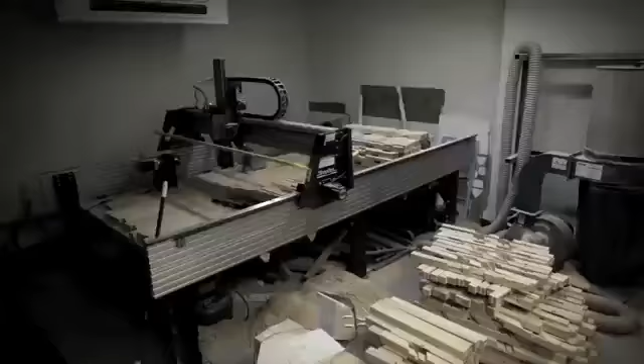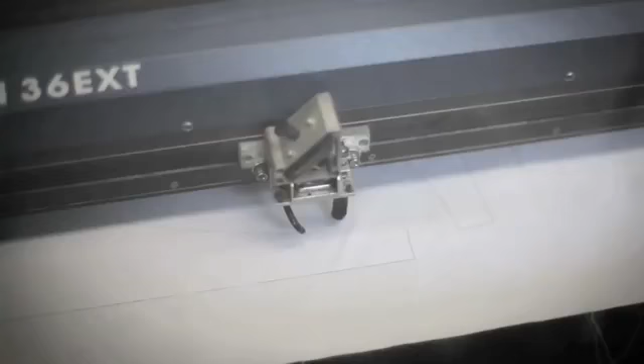Well, MIT is a very different kind of institute. Instead of becoming the recipients of building industry culture, we can now change building industry by the kinds of experiments we're doing in school. MIT has a variety of departments that are so powerful that they have the potential of radicalizing what we do in design and in the architecture department.

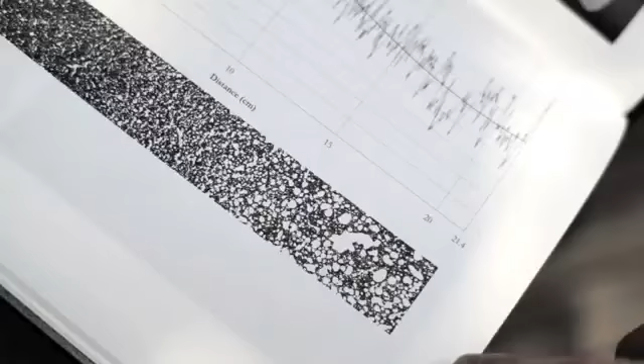Even the way that we've structured our curriculum around workshops and other kinds of collaborations in a way foster and encourage this kind of cross-disciplinary platform. So we're situated perfectly for the kinds of things that only MIT can do.

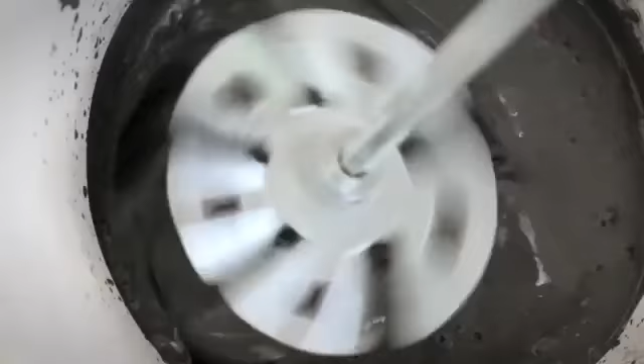The invention of human artifacts of any kind always consists of three elements: the geometry, the process, and the material that constitute that artifact. It's very clear that new materials engender new forms, and architectural design benefits from addressing, applying new materials in an

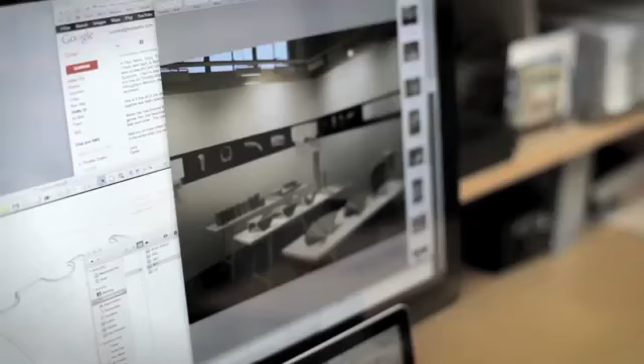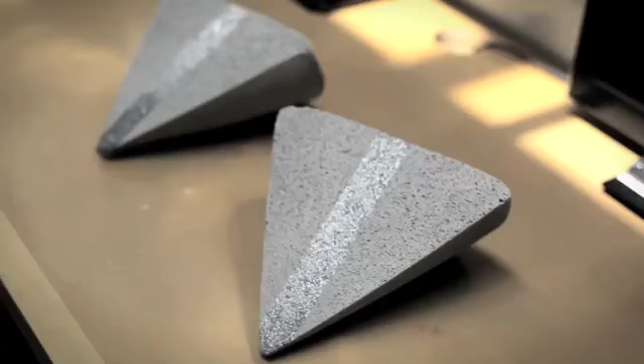informed way. The Emergent Materials Group and the Urban Metabolism Group share a central interest in materials for the built environment. Lately, we've been working a great deal in the area of foamed materials, especially foamed cements and concretes. So typically a beam in bending is going to have the greatest amount of stresses on the top and bottom, so we can reduce the amount of material on the interior of a beam.

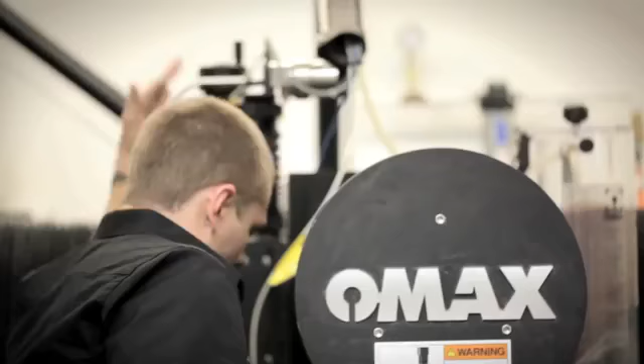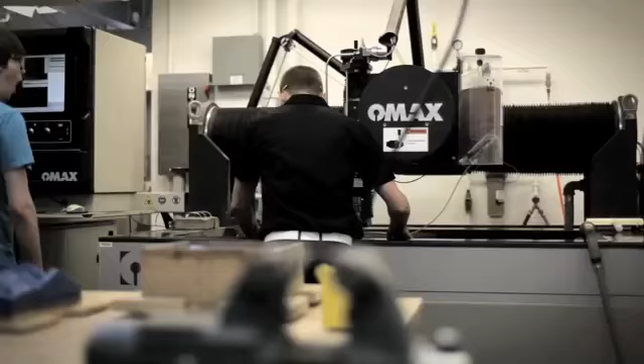The work really tries to address that there's two main paradigms throughout almost every industry. The one paradigm is what can you design, what can you compute or analyze, and the other paradigm is what can you physically construct or what can you build. The work really tries to traverse all scale lengths.

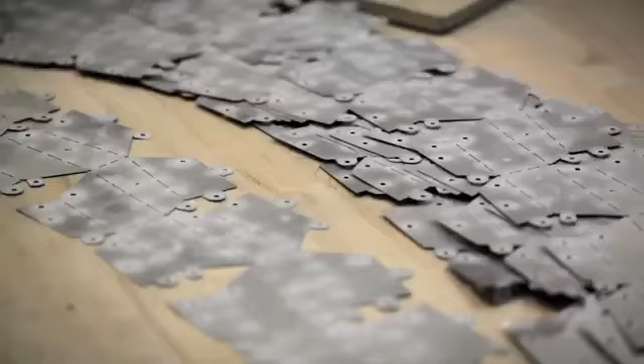It tries to work from the nanoscale, which is traditionally where we see self-assembly in biological examples, chemical examples, and it tries to bridge that and say, can't we use this phenomenon of self-assembly as a new paradigm for building things at large scale?

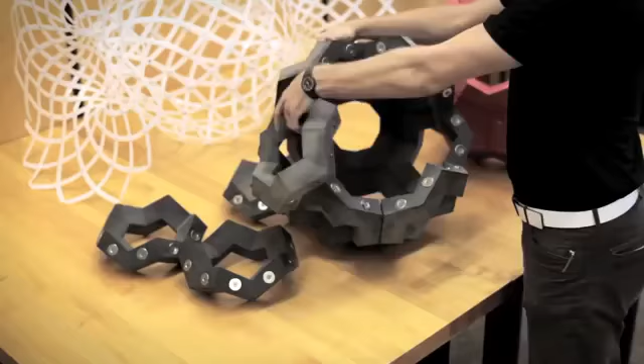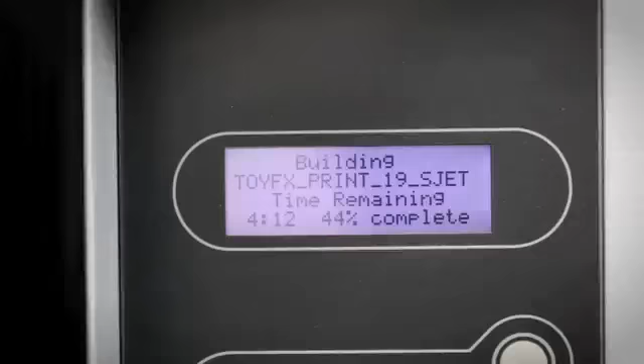We work with any type of material, synthetic or natural materials, and really try to design specific geometries that have materials in mind. And when you design those two together, they can respond to energy. And the energy sources can be heat, shaking, gravity, pneumatics, electronics. So you can use any type of energy.

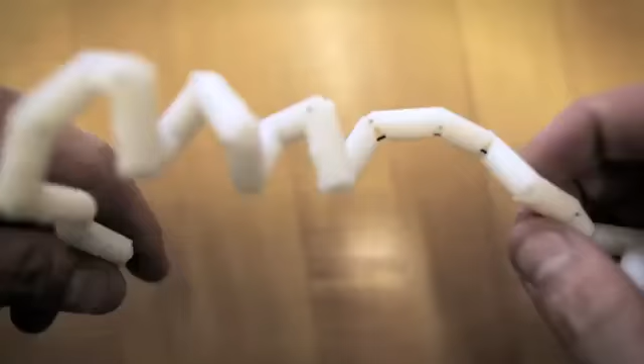And when you mix that with the geometry and material properties, then they can respond and they can change state. Primarily, it will first be applied in extreme environments, scenarios where it's difficult to build.

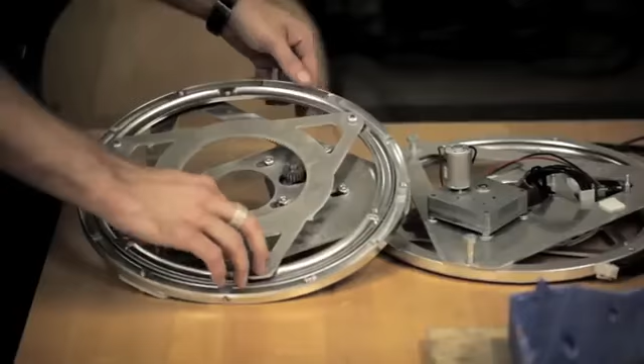The research and the practice is really about cross-disciplinary collaborations between designers, scientists, engineers, working on this phenomenon of self-assembly, discovering where we find it naturally, where we can use it synthetically, and trying to apply that at all different scale lengths.

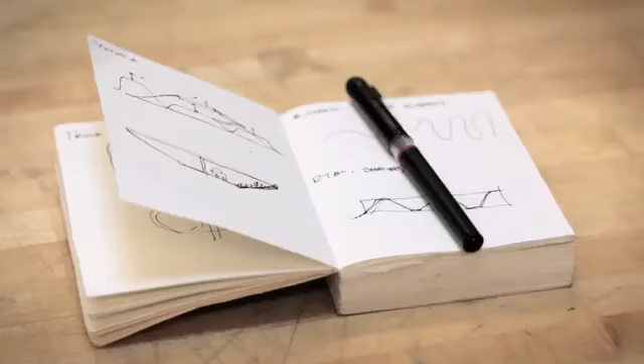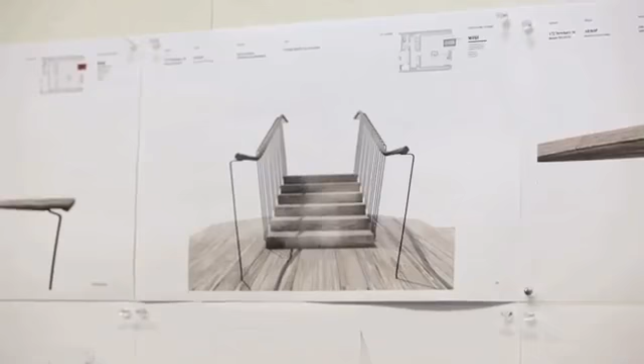The focus of our work, at least at this smaller scale, at the scale of, say, art installations or retail, we leverage CNC fabrication methods, but not as a way to exude their prowess necessarily, but more as a way to help us get at a particular formal agenda.

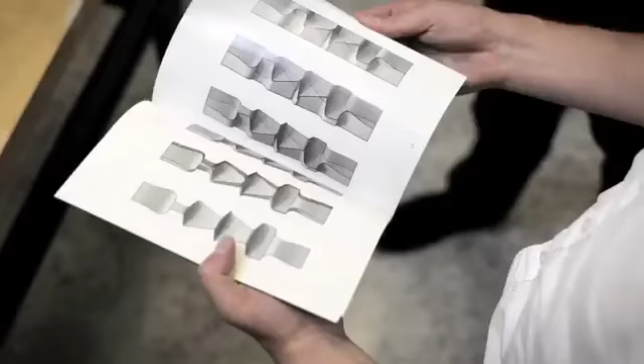An installation called Totems, which in a way is a kind of proto-architecture, not quite architectural, not quite sculptural, but I think that it offers a kind of proposition to each of those disciplines. We do a lot of testing via 3D prints. A lot of the formal investigations for Totems specifically happened in 3D prints.

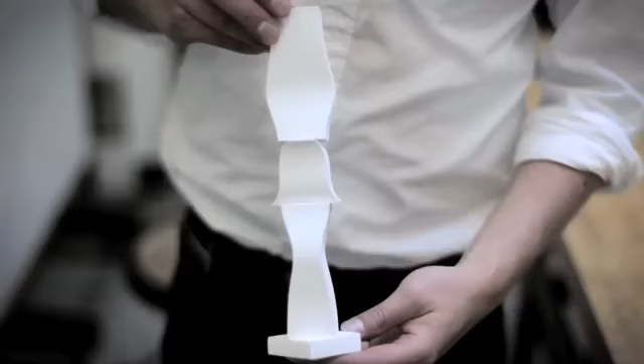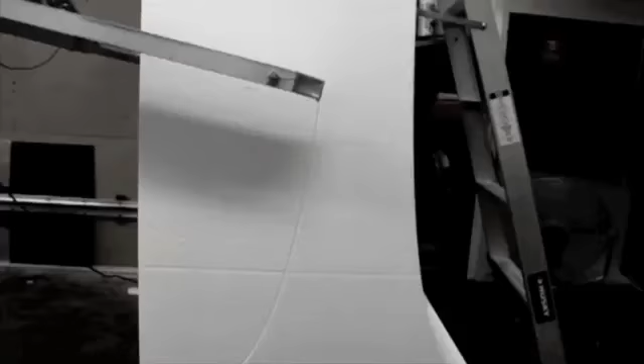We did maybe 30 to 50 3D prints of the totems as a way to understand how the light and shadows were working and how best the anamorphic effects were working before we went to the large format wire cutter. In terms of collaborations, some of those happen here at MIT.

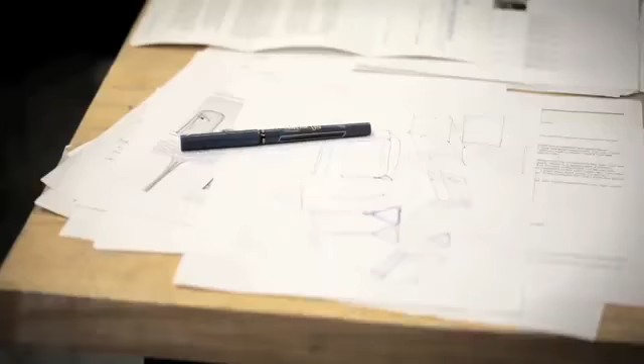Joel Lamere and I are developing an installation now, which is an anechoic chamber, and the anechoic chamber uses industrial felt both on its exterior and as a way to absorb sound on the interior. I'm bringing a kind of disciplinary or formal or geometric interest on the one hand, also a certain set of specialized understandings of the behavior of these sheet materials on the other.

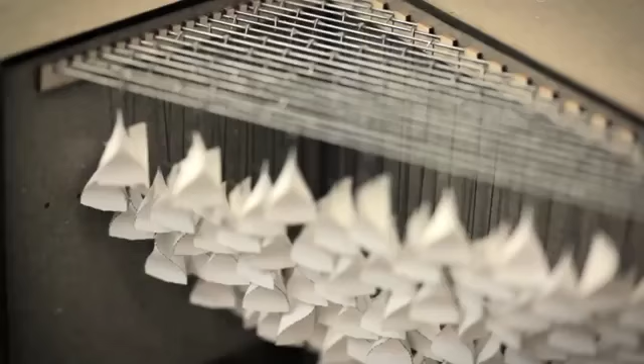So my architectural interests are really broad, but in terms of my current research preoccupation, it's about material geometry, specifically sheet shapes or sheet material geometries, how they bend, stretch, stack, fold. But obviously understanding sheet materials is really critical to architecture. It's sort of a long-standing discourse on sheet materials in architecture, in part because it's so ubiquitous in conventional

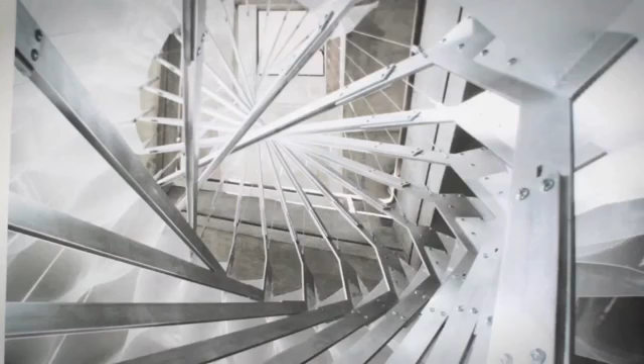construction. So everything including plywood, sheet metal, steel, aluminum, plastics, all of these have to deal with the developable surface geometries, which is to say sheet shapes generally. And so expanding the total set of understandings about sheet shapes is a totally and kind of obviously worthwhile architectural undertaking. These installations attempt to jump from the scale of the paper model to the scale of the architectural space at the very least.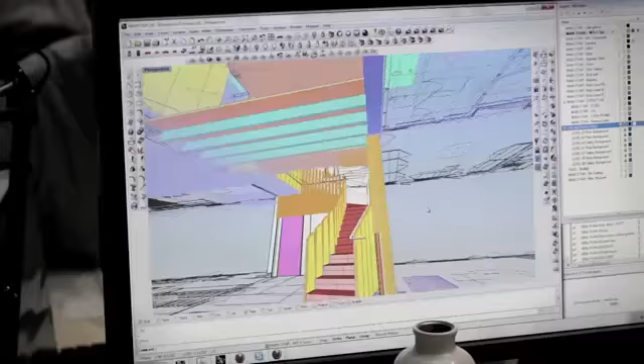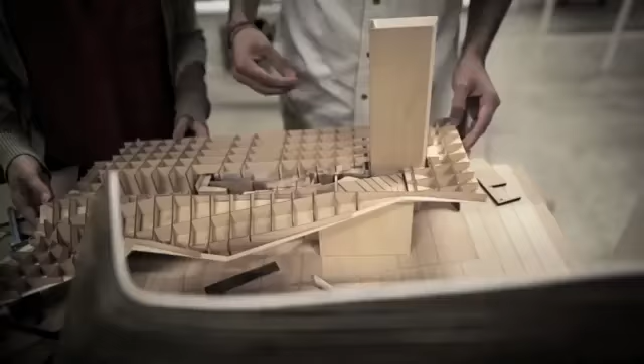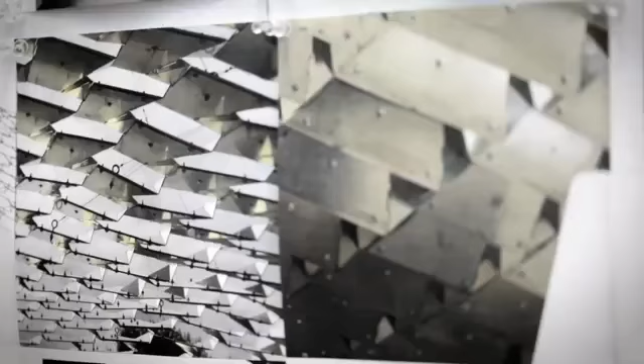Well, over the past 20 years, first as Office DA, now as NADAAA, we've identified 2 or 3 areas of focus. The first has been to look at materials and their behavior as a point of departure for many of the architectural experiments we do. The second area is to recognize that materials don't have an endless limit. Everything comes in modules, in sheets, in blocks, in bricks, and that without aggregation, there's no way of beginning to figure out how construction works in general. So the detail of bringing things together as a point of departure has been another central focus.

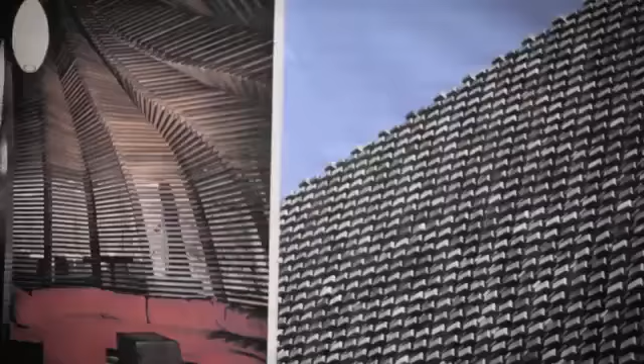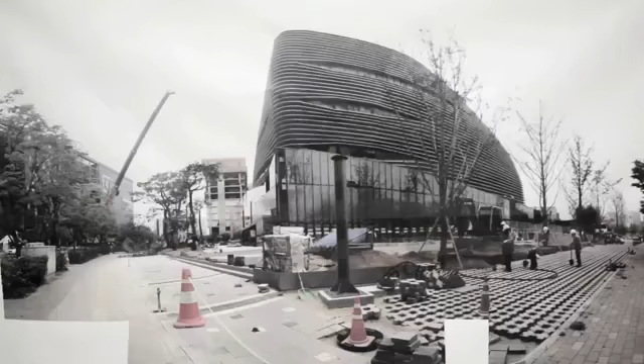So this has been a kind of point of revolution for a range of projects that we've researched and undertaken, some of which are at the scale of a piece of furniture, others that are at the scale of a building, and others that are really at the scale of urbanism.

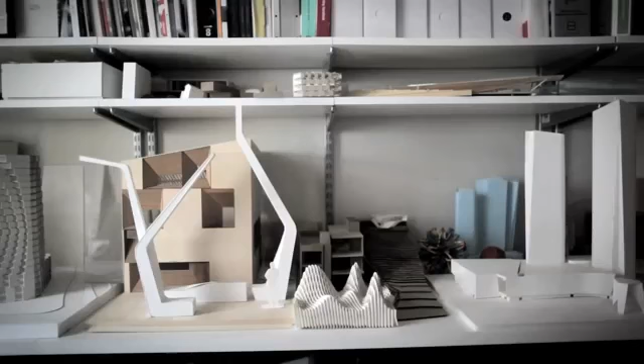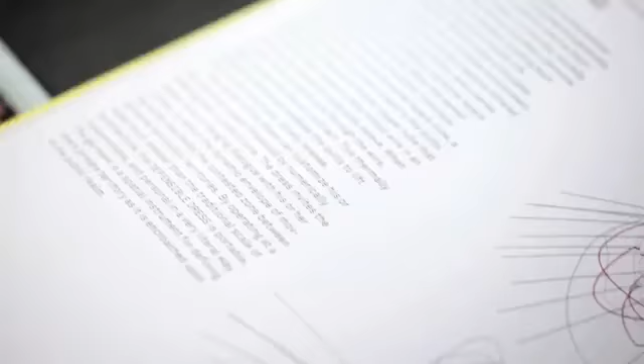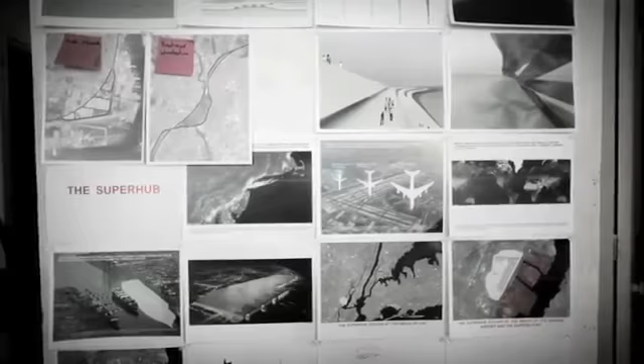One of the agendas of the studio is to create interactive architectures for public space through design and technology. And these projects can range in scale from the scale of the body, such as the Defensible Dress Project, which is a wearable architecture which uses a microcontroller and shape memory alloys to defend your personal space, to very public scale infrastructural projects such as our proposal for the Audi Urban Future Initiative, where we're speculating on high-speed regional infrastructure and transformations in the city around issues of mobility for the year 2030.

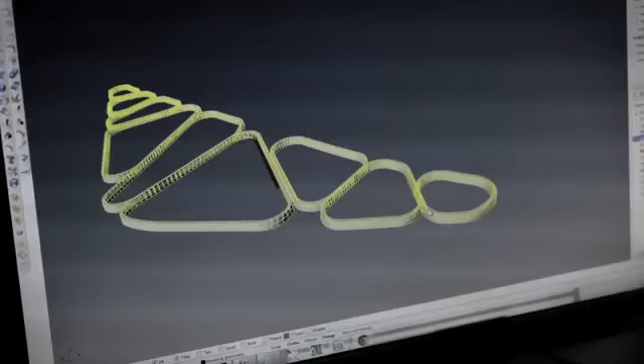It seems now more and more necessary that our environments have to become smarter, more responsive, and more flexible. The way in which architecture is made needs to be completely rethought if we're to go beyond bricks and mortar to engage the challenges of the next century.

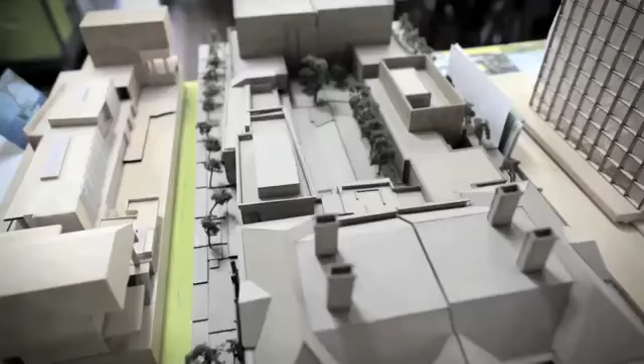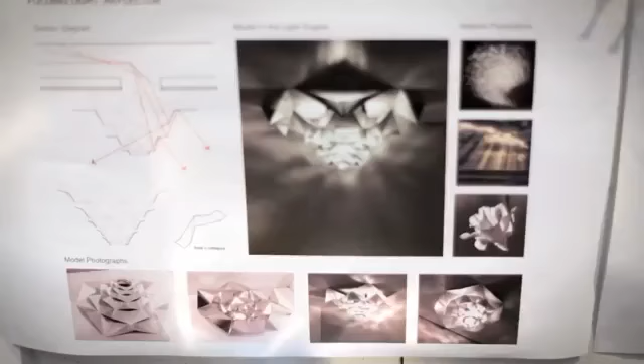My work as an architect focuses on designing architecture and urban scale interventions that engage the emergent infrastructure of our time. We're interested in how design engages that mutability between energy and matter, when materials generate energy or store it, when materials are dynamic and change state, exchange heat, produce light, or communicate information.

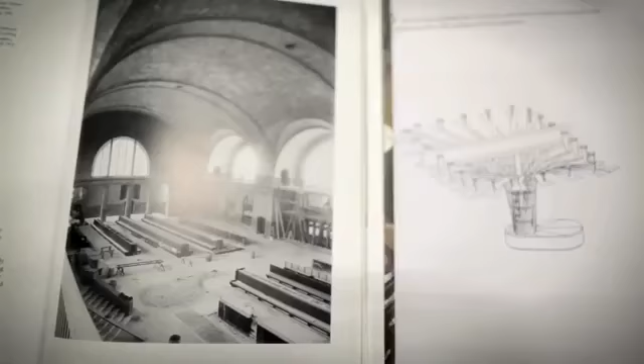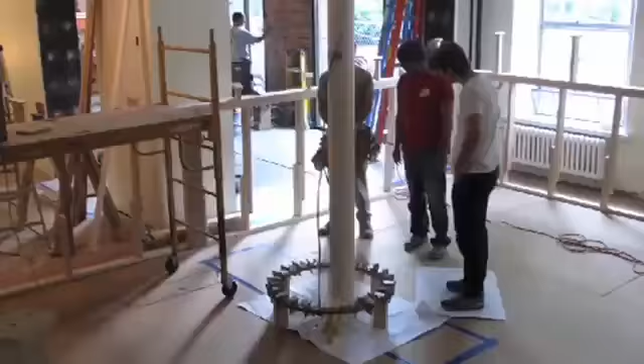The challenge, I think, for the discipline of architecture today isn't in digital fabrication, it's in material fabrication, in thinking about what it means to be material today when we move fluidly between digital and physical realms, how we use materials and not waste them, and how we form materials and how we transport them.

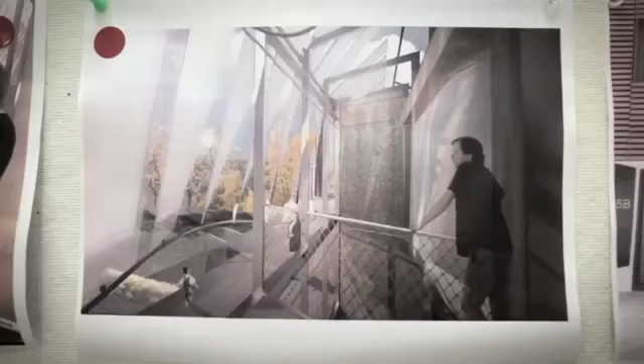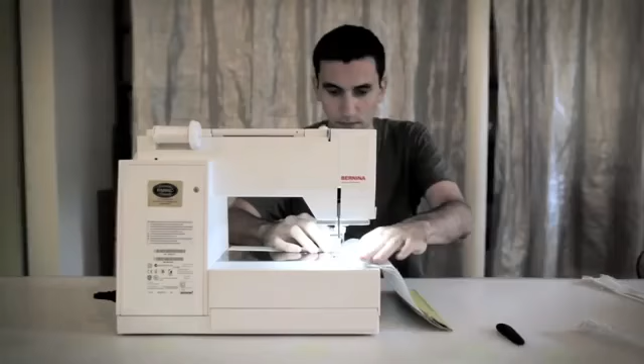If we're going to change the building industry and regenerate an innovation-based manufacturing segment in the United States, then I think we need to do this from within practice, from working with the norms of the building industry, but not settling for those norms, instead innovating to both accept and transform those standard conditions.

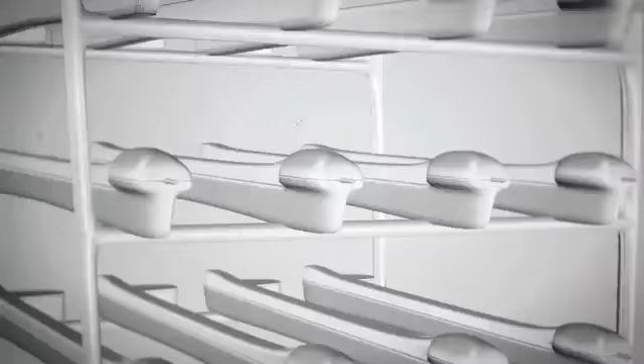I think we're pursuing several initiatives relating with computational material at several different areas. Dynamic interactivity is one with Hypersurface, and we're driving that forward. Imagining actively alloplastic environments, if you like. It's a demonstration of the power of computation come real time.

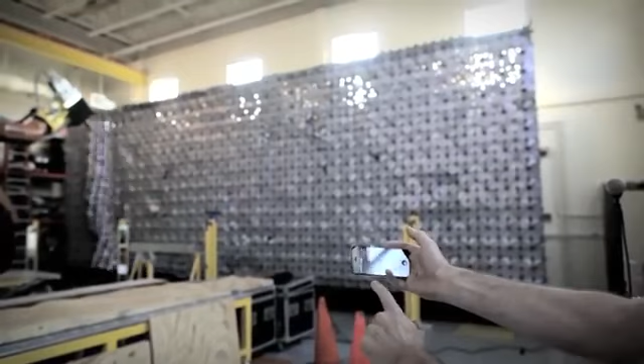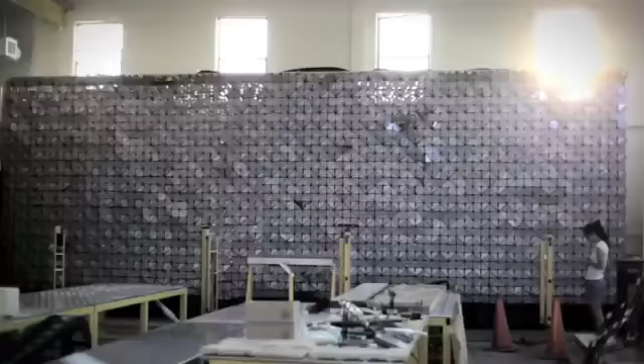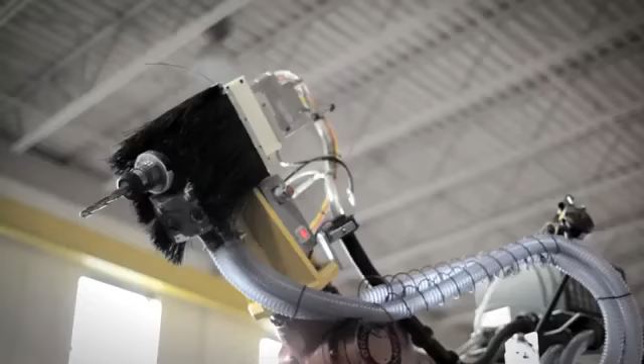Then in the robotic manufacturing work, we're looking for sort of power, information and material all coming together, but with control directly at the architect's workplace. So we're developing tools that allow architects within their native software like Rhino to pilot a powerful production machine like a KUKA robot, demonstrating, I think, what will be the future of manufacturing, which is sophisticated algorithms and modeling that link directly to sophisticated manufacturing machines and allow both new efficiencies but new versatilities, new formal complexities.

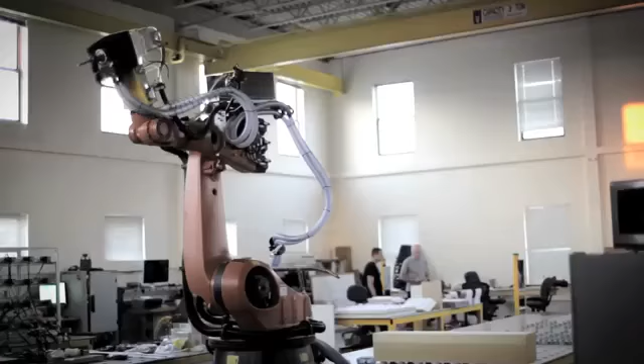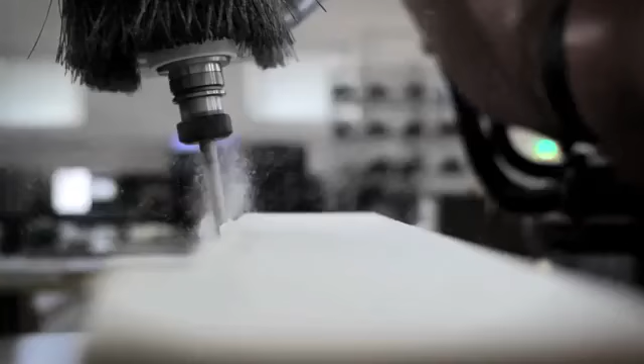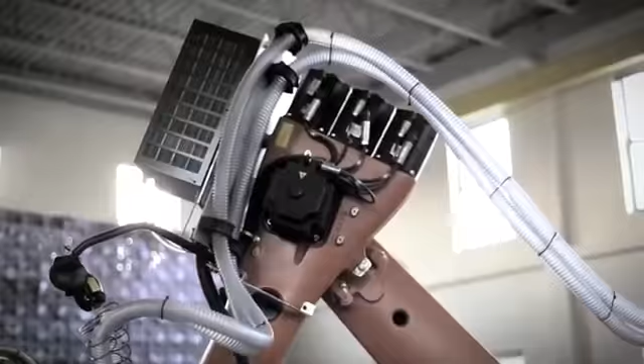I'm also frustrated by the slowness of the building industry to innovate materially. There's a fantastic amount of research in material science that's pent up and is just dying to come at a period where the sort of environmental concerns are becoming so enormous, and the challenge of building the developing world is so extraordinary that they're necessary. CAD/CAM meets material science like composites, I think, is going to breathe a whole new life into the architectural and building industries. So.